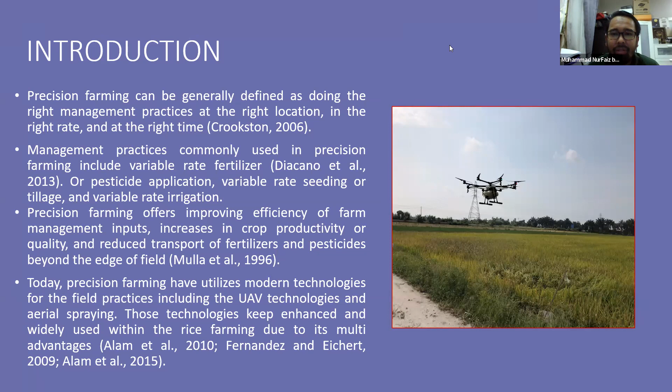They have been using a lot of sensors to extract information on soil characteristics for soil prediction, soil fertility, and for precise fertilizer applications.

We also use plant imaging to determine the population, what's called the plant density inside the fields, and we're planning for precise harvesting.

The uniform harvesting process is very crucial so it helps further in scheduling the harvesting process and prevents delays during agriculture activities. It further helps in transferring and harvesting the crops from the field to the markets.

Crop protection and fertility, of course, yes—one of the fundamental applications for using drones. Right now there are a lot of companies that cover using insurance for the rice field.

They use this drone as part of the mitigation or planning process in covering crop losses for any disaster, especially right now my country also has problems with cyclones and heavy rain. So insurance companies are using drones in predicting what crops are being lost, to help farmers cover their losses.

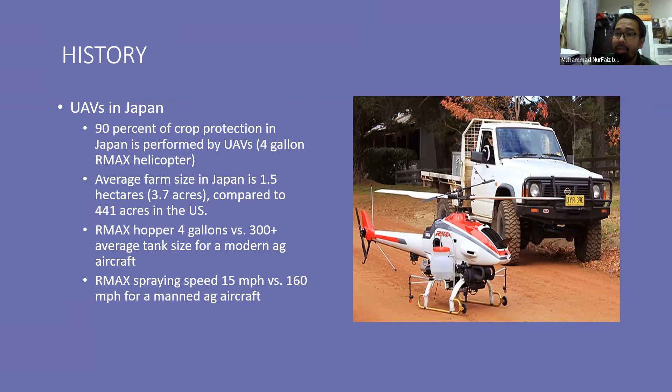And China, I think, is going to seek - covering the markets in terms of drone technologies.

There are types of UAVs: single rotors, multi rotors, fixed wings, and also a hybrid type of multi-rotor plus fixed wing called VTOL. Each of these types of UAV has its own specialization for application in agriculture activities.

Single rotors can be used for spraying, especially for small areas. Fixed wing is for mapping, surveying, and monitoring. Multi-rotor is a more stable option for accurate and precise spraying. Hybrid multi-rotor and fixed wing also has multi-specialization, multi features for agriculture activities.

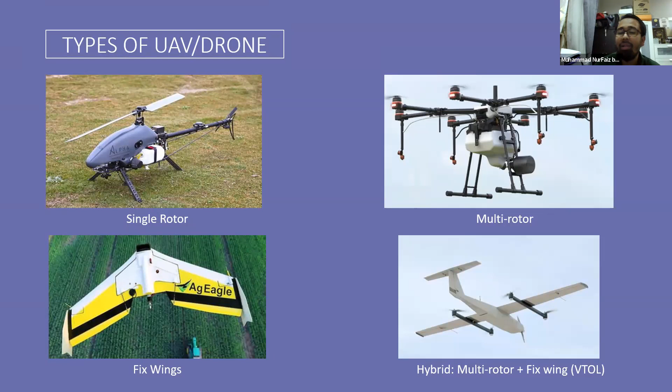You can see the comparison between these types of UAV in terms of altitude, control range, and speed. Multi-rotors, like the DJI Agras, can reach altitude up to 2 kilometers, with a range covering about 5 kilometers, and a speed of about 7 meters per second. Fixed wing has an altitude of about 0.125 kilometers, a control range of about 2 kilometers, and a much faster speed of 18.8.

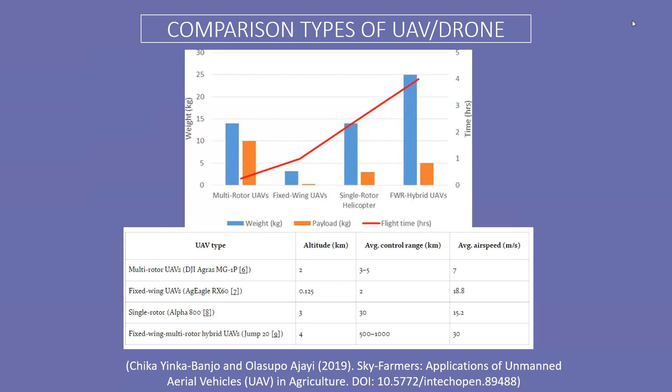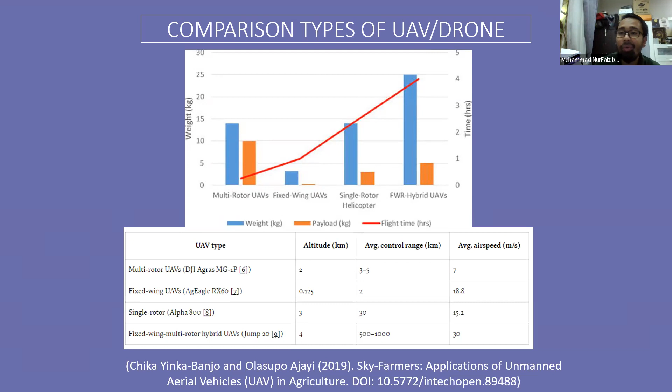Single rotor has an altitude of only 3 kilometers, control range about 30, and speed about 15.2. However, the fixed wing VTOL has an altitude of up to 4 kilometers, much higher, and a control range of up to 1,000 kilometers, with a speed of about 30 meters per second. So VTOL is much better in terms of performance. However, if your farm is huge acres, VTOL may be the right choice, but it depends on your budget and your skilled workers who can operate these. Not every farm can use similar drones.

This one is a DJI Agras, basically being used for my research and also field activities. This is a 15 liter UAV that can be used for crop protection inputs and fertilizer.

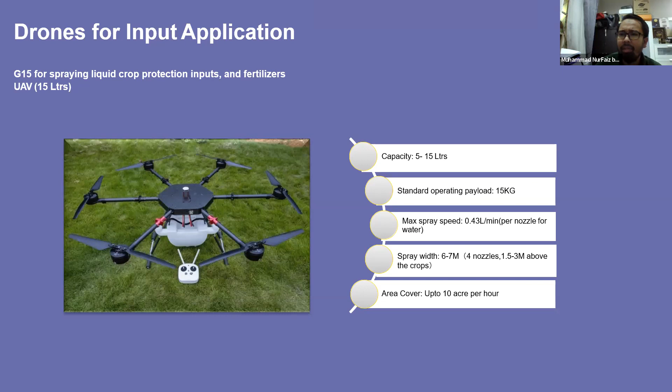Basically, for my research, I focus on fertilizer to understand what actually the best features, best characteristics or parameters are that can be used for application in the rice field.

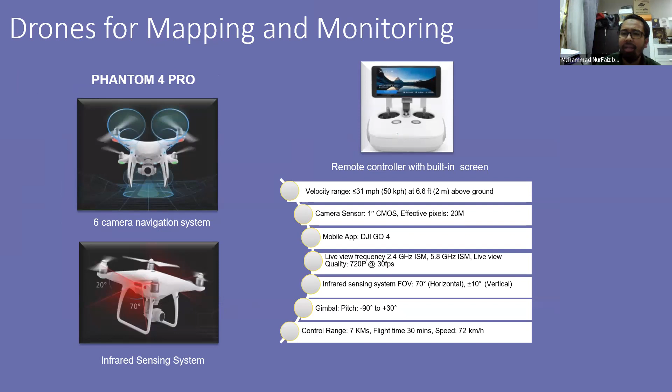So this is a mapping that I basically use, the Phantom 4 Pro, with advanced navigation system combined with infrared system which is much better. And then with sensors, mini sensors that can be attached to the drones, I have further improved this monitoring and mapping in terms of precision and smart farming for the rice field. Right now the cameras are RGB, NIR, multispectral, hyperspectral, thermal.

In fact, right now there's also very cheap LiDAR, small LiDAR from China that can be attached to the drones, so you can have further capability using it for agriculture activities.

So in my country, basically UAVs are solely used for pesticide application, for crop input application. They are less focused on using fertilizer. So maybe the problem is why the farmers, why the service providers are not focusing on using fertilizer. I will try to answer that question, why the service provider companies don't use fertilizer for rice field activities.

So all these technologies, right now there are granular tanks, 8 liters to 16 liters, where a few years ago we only used aerial spraying, but right now we can use granular fertilizer with the drone to spray or broadcast on top of the rice field, which is very important because rice plantation actually requires granular as part of its fertilizer management.

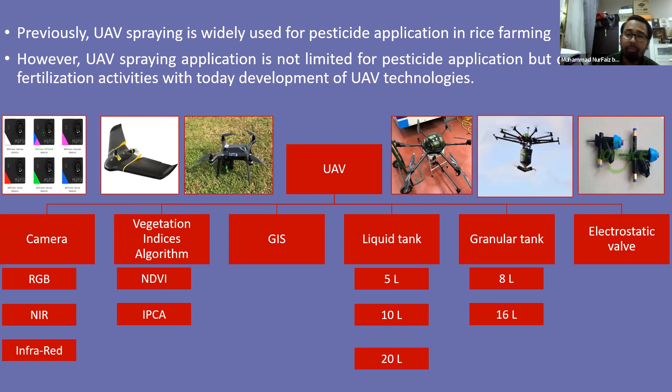And part of that, my study also uses the electrostatic valve, where it improves further in terms of preventing diffusion, droplet dispersing further from the targets. So actually the valve is very important and can be implemented within the drones.

So this is the study that I've done in the rice field at UPM in Malaysia, using the multi-rotor propeller. We maintained the height constant at around 2 meters from the canopy of the rice field, and then we flew the UAV, the drone, at three different flying speeds.

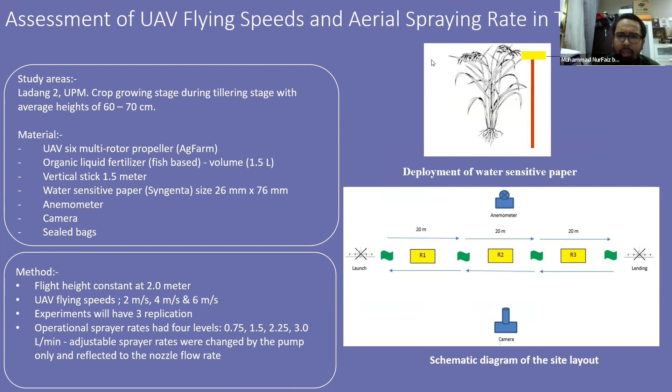2 meters per second, 4 meters per second, or 6 meters per second. And then we had 3 replications, and 4 different spray rates to spray the fertilizer on top of the rice field canopy. So this is a schematic diagram for the site layout. We captured images and all parameters at the field so that we don't miss any detailed information.

So this is a spraying pattern analysis of the result from the experiment, the studies. We found that the droplet deposition density based on the UAV spray rate in liters per minute - 2 meters per second had the highest numbers of droplet deposition density compared to other flying speeds. So 3 liters per minute is the best one if you're flying the UAV at 2 meters per second compared to 4 or 6 meters per second.

However, as we calculated the coefficient of variation, we found that if you like to fly your UAV at 6 meters per second, you should only spray at around 1.5 liter per minute, so that you can get a better deposition density during your UAV flights. But it's recommended for the rice field, to get the highest numbers of droplet deposition density and also less droplet dispersion that doesn't reach the accurate targets, 2 meters per second is the best one with 3 liters per minute.

So the final result, we found that the best spraying rate and UAV speed, while doing the activities, wind speed needs to be around 1 or 2 meters per second only. And then 2 meters above the rice canopy is the best one - further than that, the droplet will be dispersed much further. We recorded that it can go up to 500 meters, the droplet dispersed. So the spray, again, 2 meters per second is the best one with 3 liters per minute for spraying on top of the rice field for fertilizer.

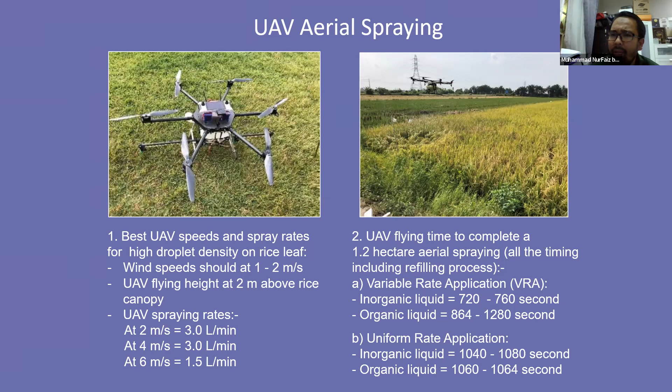The organic liquid takes the second highest speed compared to the inorganic one, because the organic concentration is much lesser compared to the inorganic one. That's why it requires more liquid, and more time, to complete 1.2 hectares for rice field spraying.

We also measured the UAV field capacity, operation time, and number of batteries required during the field operation for 1.2 hectares, as well as the actual field capacity and operation time, so we can provide beneficial information for the service provider. This is one of the tables from the experiment.

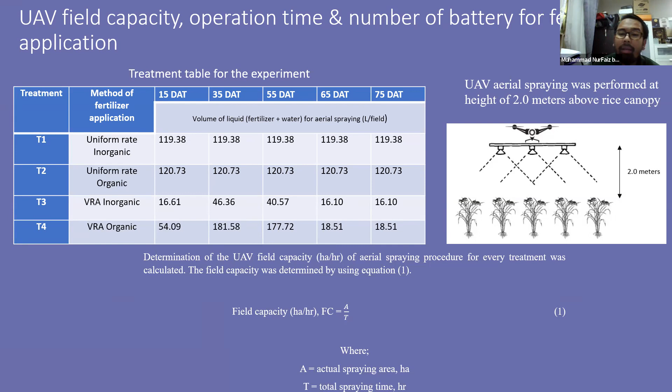This is the volume used. We maintained 2 meters above the rice canopy. This is the equation we used to calculate the field capacity.

This is the result, the total time recorded for UAV spraying operation for different treatments. From here we can see that variable rate application for inorganic is much faster to complete 1.2 hectares.

The area labeled 15 DAT is basically the growth stage of the rice crop, meaning 15 days after transplanting. We recorded activities 5 times until crop harvest. 75 DAT means 75 days after transplanting, around 20 days before we harvest the crops.

We found that variable rate application is much faster compared to uniform, and organic is average compared to uniform. However, uniform is still the highest, taking more time to complete 1.2 hectares for the UAV spraying.

The reason is they are significantly different due to the volume of liquid for each treatment. Uniform requires much higher numbers, the volume of fertilizer recommended by the supplier, so it takes more time to complete.

With variable rate, we do site-specific nutrient management, where we calculate the precise fertilizer needed based on actual crop needs. We have our own modeling based on crop content, and calculate the numbers of fertilizer needed, then supply accurate fertilizer to the crop using the UAV.

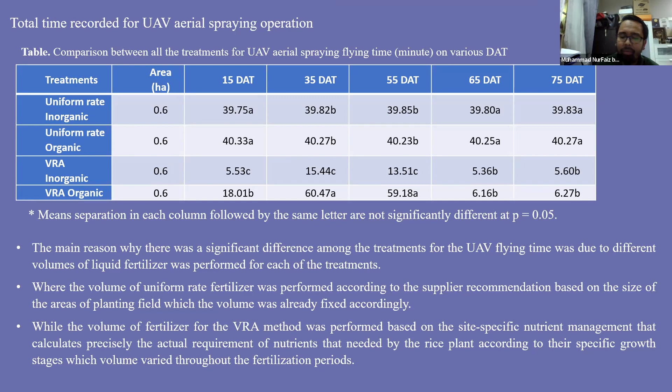So it shows that variable rate inorganic is much better compared to uniform and organic, in terms of total time recorded.

We also recorded UAV refilling frequency, the numbers required for refilling, because refilling is also one of the tedious jobs that needs to be done by the supplier. I think this is the reason why most drone service providers don't implement the fertilizer activity, because there is a high frequency of refilling required to complete 1.2 hectares.

For example, for the uniform treatment, you can see 12 times to refill tanks during the activity, compared to two times only for the variable rate application. For 1.2 hectares, uniform needs 12 refills while variable rate only needs about two refills.

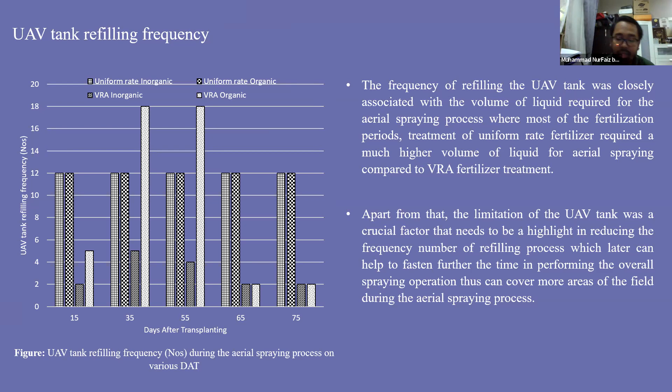You can see that 35 DAT and 55 DAT are very high for variable rate organic. This is because during this period, organic fertilizer was supplied at the highest rate compared to other treatments, since the concentration of organic is lesser compared to inorganic fertilizer. That's why we need to understand this, so that service providers can get this information and apply it beneficially in the field to help farmers.

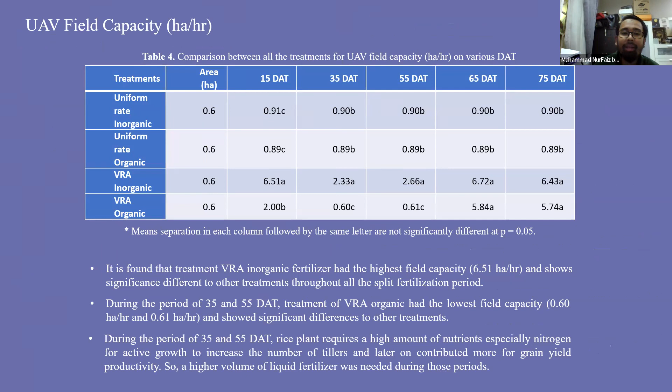So you got the field capacity again. Variable rate application is the better one compared to the other treatments. Uniform is the lowest one again, compared to the variable inorganic. This is in terms of field capacities.

So in conclusion, I can say that field capacity varies according to the different treatments that we apply. And then variable rate fertilizer shows higher field capacity, faster flying time, less refilling process, and uses less battery sets compared to the other treatment for the fertilizer activity in the rice field.

Overall, volume of liquid basically affects the total area spraying process. So from our study, we found that variable application had further benefit in terms of fertilizer application using drones in the field activities. I think that's all for me.

I only had example in case study. Maybe if enough time, you have time to share. We get back to the Dr. Deborah. Any questions? Thank you.

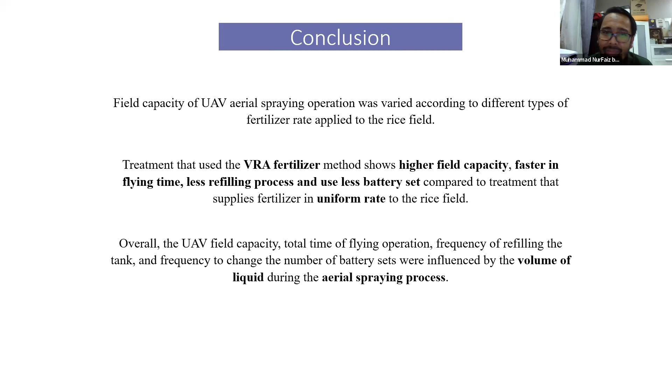Thank you, Dr. Faiz, for that comprehensive response to my question. Are there any other questions for Dr. Faiz? I'm not seeing any in the chat.

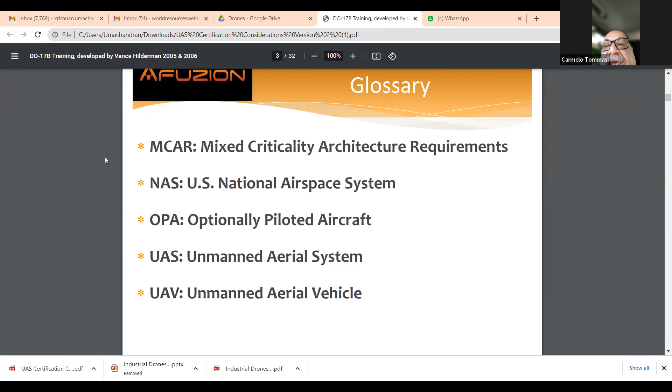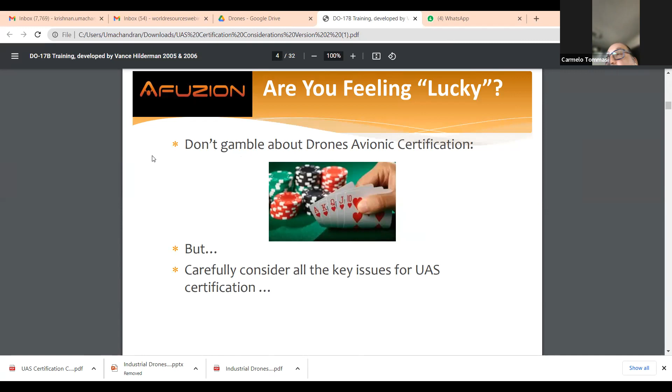It is good if you like to gamble, but please don't gamble with UAV avionic certification, because to have an effective certification, you need to carefully consider all the key issues of the UAS and the UAV.

First of all, what is a UAV or UAS? Is it civil, is it commercial, is it military, or something else? Is it a helicopter, is it an airplane, is it large, small, commercial, civil, military?

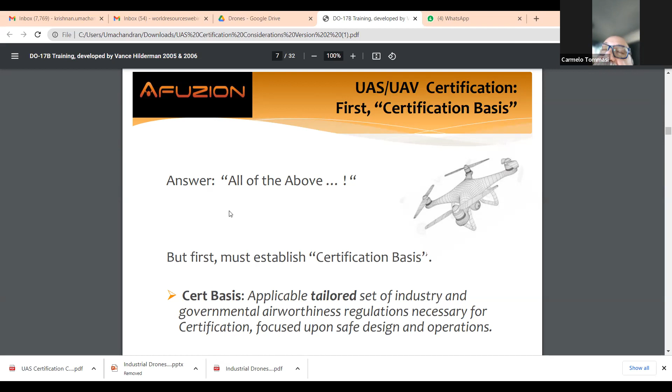The answer to that is all of the above, because UAS and UAV are all the definitions we said in the previous slides. So we have to first establish a certification basis because we have to tailor a set of industry and governmental airworthiness regulation to those kind of systems for certification. And the big focus, especially for civilian application, like the ones named by Mohammed in the previous presentation, is safety of the design, the UAV, for safety of operation. We have to operate safely. Okay, what is the aviation development ecosystem?

Those are all the applicable certification documents. We start from the safety guideline, ARP 4761A. You start from safety, then you go to ARP 4754B, the guidelines for system design and development. And then you have all the specialized documents. For example, DO 178C for airborne software, DO 254 for airborne hardware, DO 278A for the ground station to control the UAV, and so forth.

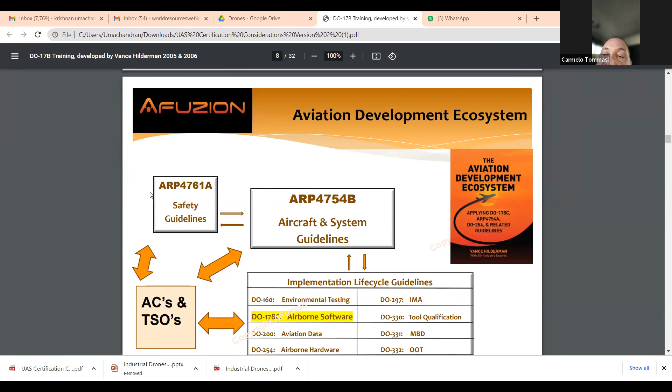Okay, we will try in 3 minutes to have a quick recap of the DO 178C certification. What is DO 178? It is the certification standard for airborne equipment.

DO 178 is software, DO 254 is hardware. It is regulated by FAA in the US, Federal Aviation Administration; EASA in Europe, European Aviation Safety Agency; DGCA in India, Directorate General of Civil Aviation; CAAC in China, Civil Aviation Administration of China. So the names of the document vary. For example, it is DO 178C in USA, ED European document 12C in Europe, or DO 254 in USA, ED 80 in Europe. So the name changes, but the documents are all the same.

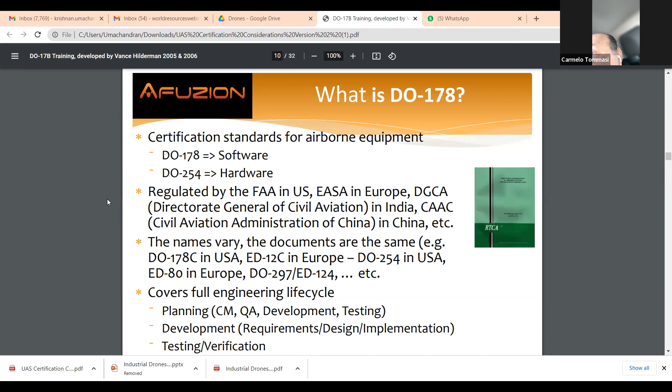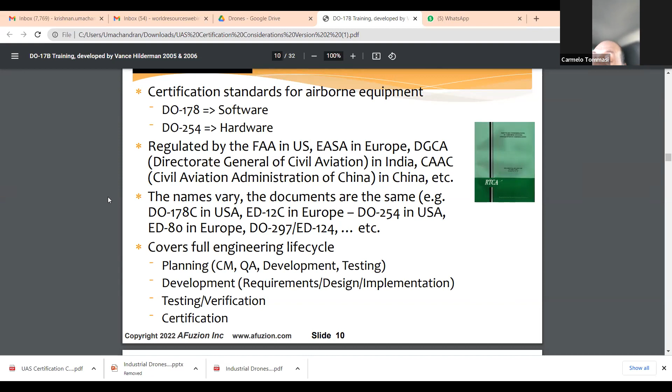The certification considerations for airborne equipment are the same all over the world, and cover the full engineering life cycle of the system: planning, configuration management, quality assurance, development, testing, from requirements to design to implementation, both hardware and software, to testing, verification, all through development, and finally certification.

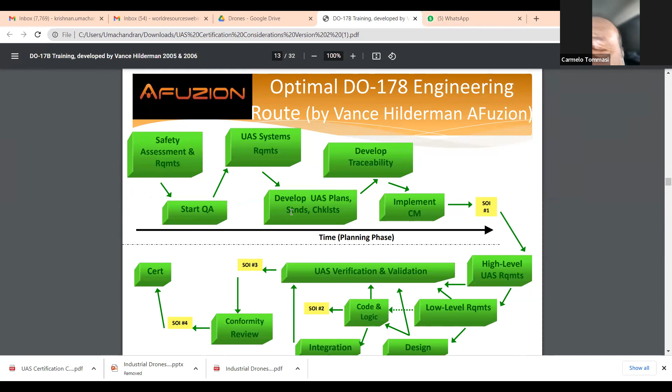This is the optimal DO 178 engineering route also for UAV and UAS. You start from safety assessment and the requirements. You start quality assurance for software and process assurance for hardware. You create the system requirements, develop the plans for UAS and UAV, the standards, the checklists. You develop the traceability from requirement to implementation and implement the configuration management. Then you have SOI 1, stage of involvement 1, with the certification authority.

And you go to high-level UAS requirement, low-level requirement, design, code and logic, integration, and remember the verification and testing. And you have stage of involvement 2 with the certification authority, talking about whether you have satisfied all the requirements with the implementation.

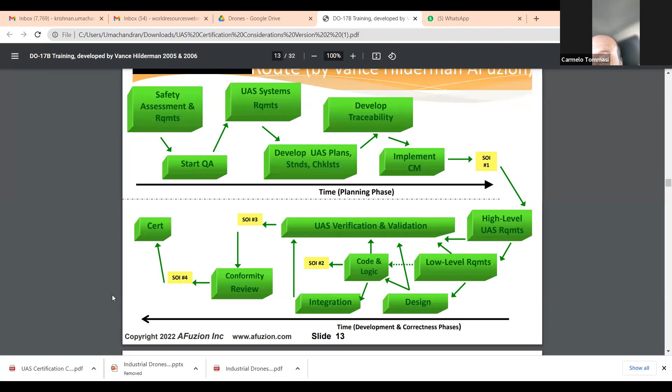Then you go to SOI 3 and 4. Okay, then you have special consideration for UAS.

Go next, please. Hello. UAS are very, very similar to commercial aircraft, which require DO 178/254, because they have complex avionics, they have complex integration, they have COTS, standard components. As Mohammed said, there are standard sensors in the UAV.

So you have landing and takeoff procedure, commercial airspace, and if you have an accident, you have civilian death. So for commercial usage, the top priority is safety. For military use, the target is not safety, but success of the mission. And let's say that the civilian certification authority lacks common knowledge to apply commercial certification rules.

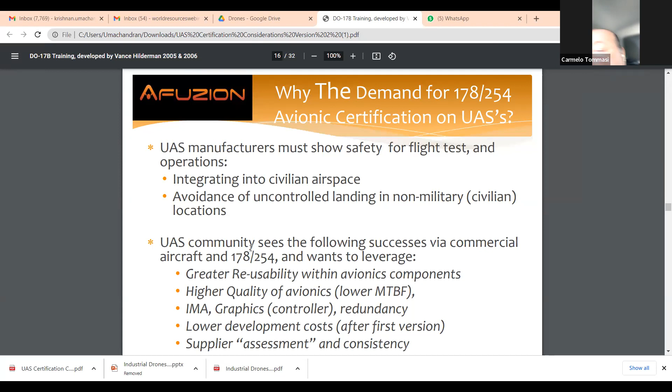Why is there a big demand for DO-178/254 avionics certification on UAS? Because UAS manufacturers must show safety for flight test and operations, since they have to integrate those systems into civilian airspace, and they should avoid uncontrolled landing in non-military locations. The UAS community has seen the big success that certification strategy in many avionics companies has reached, achieving great reusability of the UAS, higher quality avionics, lower MTBF, IMA redundancy, and lower development cost after the first project. The first certification project may cost twice as a normal development project, but from the second one on, you save money.

Some special issues for UAS: what is the criticality level? Is it safety, mission, or operation? Is it airborne or ground-based? The DO-278 applies to ground-based system certification and does play a role. Then a big role is played by FAA Order 8130-34D, certification of UAS—a document from the Federal Aviation Administration in the USA, which we will detail later. And the US Air Force MCAR, Mixed Criticality Architecture Requirements for UAS, which we will also describe later.

Let's talk about FAA Order 8130-34. It was the first document to address UAS and UAV, issued in March 2008, titled Airworthiness Certification of Unmanned Aircraft System. This order was adapted from a collection of different advisory circulars, for example FAA Order 8130.2. The most recent version of 8130-34 is 8130-34D, which applies not only to unmanned aircraft systems but also to OPA.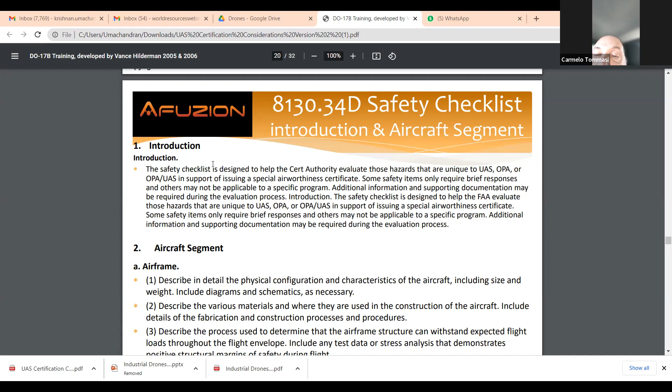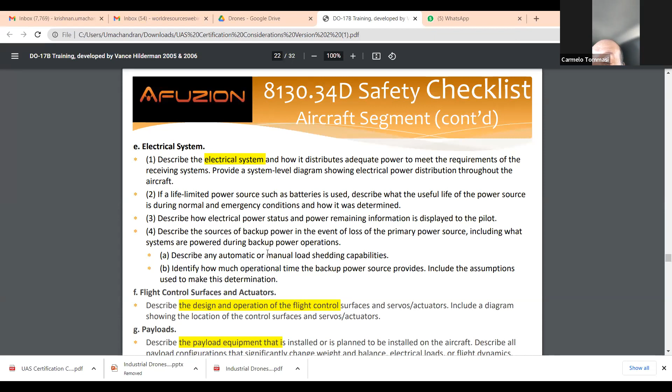The electrical system is described in detail, including the flight control surfaces and actuators, and the payload. You must describe the payload equipment that is installed in the UAV.

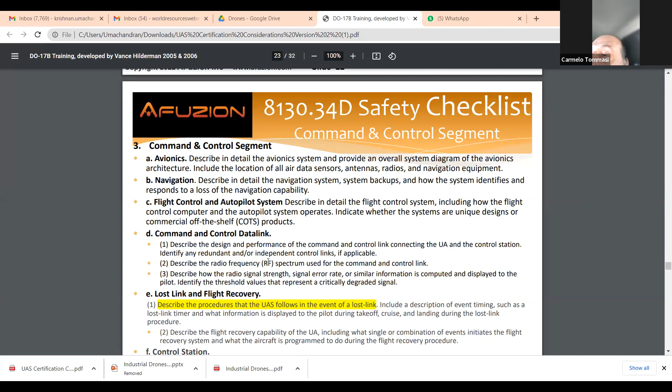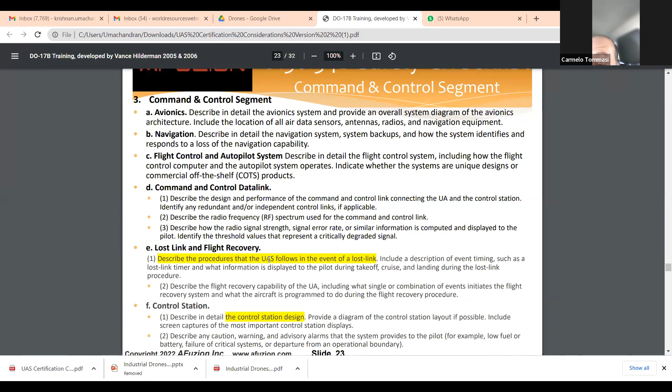Those are design checklists for the command and control segment—avionics, navigation, flight control, and the autopilot system, and the lost link. You have to describe in detail what happens when you lose the link to the UAV. What happens? Does it fall? Does it softly land? This should be very, very detailed. Also, the control station must be described in detail.

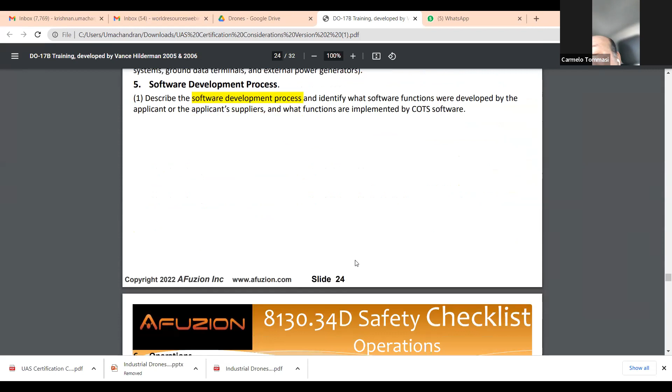The ground support equipment—how it is done, and how you mean to develop the software, both for the UAV (airborne software) and for the UAS system. Then you have to describe the operation, how the interaction works between your UAV, UAS, and the national airspace system.

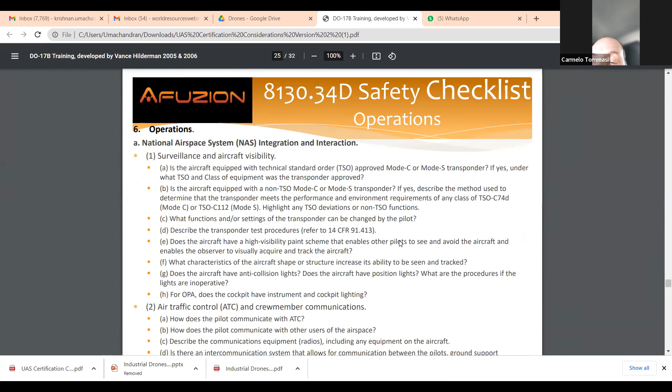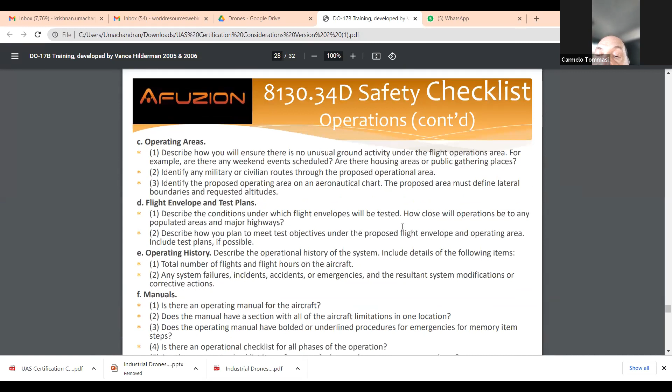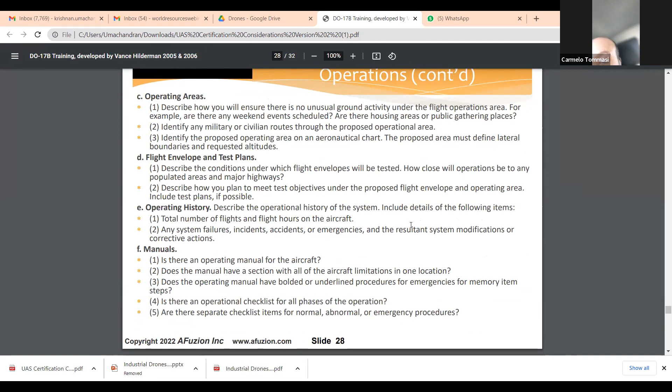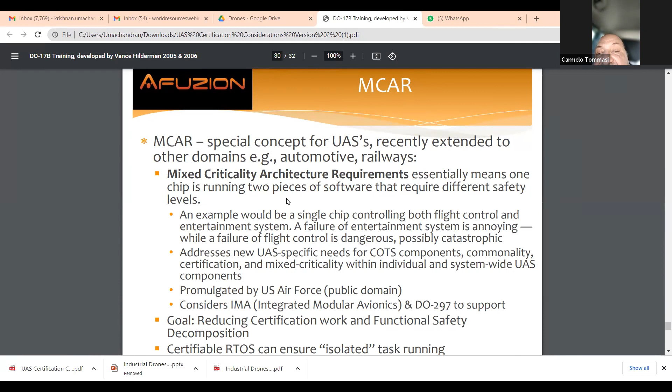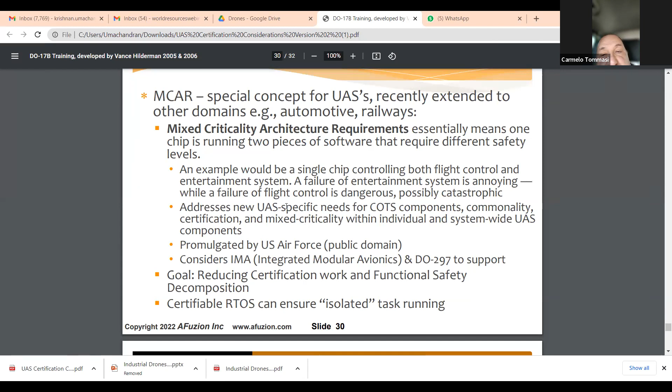MCAR is a special concept for UAS, recently extended to other domains—for example, automotive, railways, transportation, and so on. Mixed Criticality Architecture Requirements essentially mean that a CPU runs applications with different criticality levels. For example, the same chip that controls both flight control procedures and the entertainment system—so very different criticality levels. This has been promulgated by the US Air Force.

What is the goal? The goal is reducing certification work and functional safety decomposition, so that a certifiable real-time operating system can ensure isolated task running.

And finally, the summary of my presentation. Integration of the UAV into the NAS and other countries is an extremely complex undertaking because it involves safety of people, people's lives, casualties. So it is very important.

There are several issues that need to be resolved before the UAV can freely fly in the airspace system. So the goal is on safety, and R&D of UAVs is focused on advanced mitigation of performance shortcomings to facilitate integration in the airspace system. And very important, cybersecurity is becoming an increasingly important factor for UAS operation.

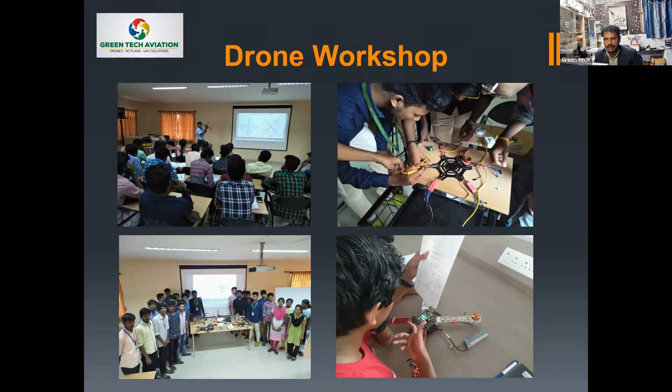So we'll be using some flight controllers like Pixhawk. Pixhawk is available worldwide, and it's an open source platform. So we can change basic values also, and we can reprogram it. Like that, we'll be training the students for doing those things.

So these are some air shows. We have a lot of aircrafts in our office, like IC engine powered, electric powered gliders, even aerobatic models - a lot of things we have. Even control line also we have. That is the most important hobby in foreign countries.

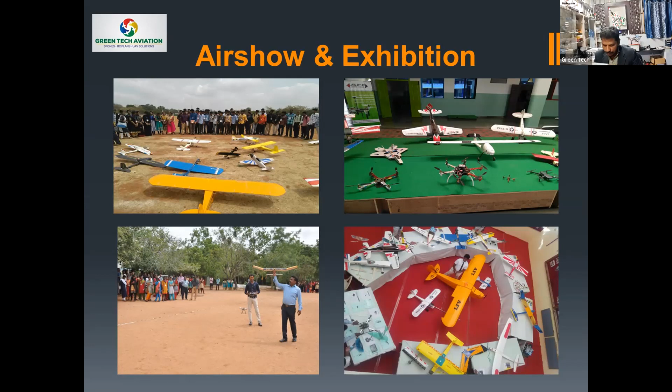They'll be using small IC engines to power their aircrafts to fly. These are the things that come before drones, because control lines were there more than before, like 40 years before it was there. So these are some big aircraft we'll be doing, and we'll be telling them about aero sports also we'll be doing, like taking the students into hot air balloons for the joy rides and all.

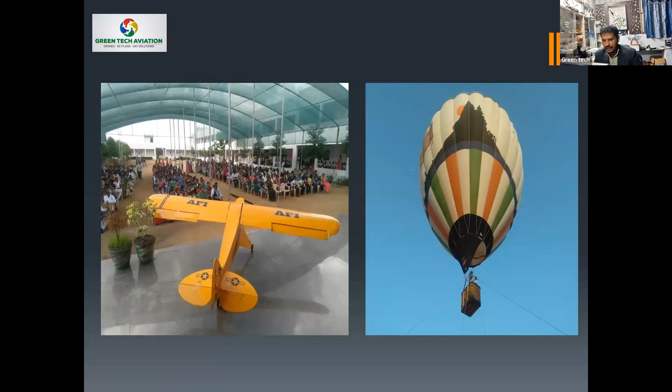So up to there, these are a simple introduction of the company - these are the activities that we'll be doing. After that, we have the main topic that we are in discussion, that is drones.

Basically we'll be using drones for these activities, like performing a mission. Initially, it was done for surveillance, using a camera for surveillance purpose. After that, we are considering it as a vehicle.

If you want to go for long range, then we'll be switching it to aircraft, so it is a combined platform. So like that, the drones are introduced.

On powering the drones, mostly they'll be powered with a BLDC motor, so the motors rely only on the batteries. Nowadays we have some batteries that are highly efficient, but the thing is there are alternate sources that came into the field. So general problems with batteries are these ones - we'll consider the battery limitations and all in the further slides.

So these are the known power sources right now in the field for powering the drones. First one is your batteries, already discussed. And the next one is your solar power panels. In fixed wings, it is mostly useful, but in case of multi-rotors, it is actually not possible because panels are not providing high density power.

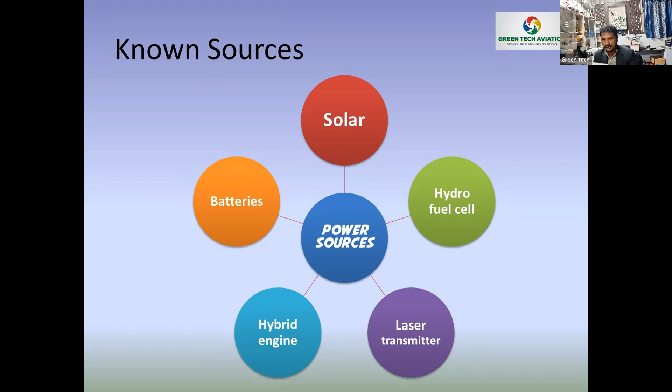Next one is your hybrid engine. That is the topic of my day, so I'll be concentrating on hybrid drones today.

In case of batteries, we'll be using lithium polymer batteries mostly, generally in the capacity of 30,000 mAh or 16,000 mAh. For our agri drones we use 16,000 mAh batteries. But whatever the mAh I'm using, I will only get 20 to 25 minutes of flight time. If I increase to 20,000 mAh instead of 16,000, even then I will only get 2 or 3 minutes higher, because of the weight of the battery. So we need to work on that - batteries have some limitations.

For choosing a lipo battery, if you are doing a project or making your own drone, you can use some simple calculations. Generally a battery is defined with 3 parameters. First, what is the voltage of your battery - that means cell voltage. Each lithium polymer cell is 3.7 volts. So if you are using a 4 cell battery, it will be 3.7 into 4, which is 14.8 voltage.

Not only voltage is a limit, we also have to concentrate on discharge rate. Discharge rate measures how much time that battery can safely discharge this voltage - that is the C rating. If you want higher power, like racing drones or FPV drones, you have to go for higher C rating batteries. If you are going for fixed wing aircraft like gliders or simple camera payload fixed wings, you don't need higher C rating batteries - you can go with 20 or 25 C, that's enough.

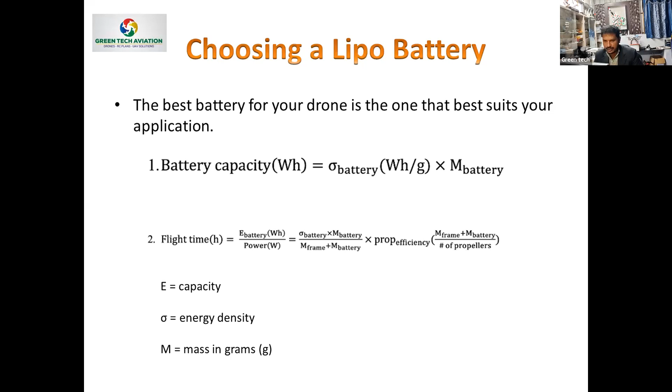If you want a better flight time, you need to optimize the battery selection very well. That's to be concentrated by choosing some basic formulas. Even without going too much into aerodynamics for the drones, you have a lot of online calculators available in the market, like Prop Calc and Omni Calculator. With that, you can make simple calculations like iterations - make initial calculations, then update them, because if your calculation is wrong you have to change your assumption to make it a better optimization. Once optimized, you can go for production lineup.

So this slide, we already discussed that - we have certain limitations in the battery.

As I already told, if you are going with low energy density batteries, you don't have enough power to take off your model. So mostly agri drones are powered with 100 kV or 340 kV motors based on the configuration. If it is a hexacopter, the kV will be higher, and if it is a quadcopter for the same capacity, the kV will be lower.

The term is already known. If your kV rating is higher, the RPM is higher, and if your kV rating is very, very less, the RPM is less, but the torque is higher. So in that term, we'll be having the battery.

Generally the batteries take a long charging time. For example, we are using a 16,000 mAh battery, so that is taking nearly 35 to 40 minutes with 14 amps of current. If I increase the current amps, it can charge in less time, but the cycles will decrease soon. So you have to charge your batteries at less amps, mostly up to 10 amps or 8 amps, but it takes more time to consume.

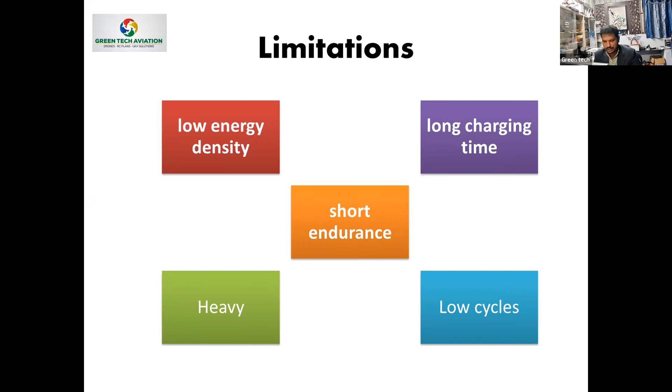So, short endurance. Most of the batteries will give only 15 to 20 minutes, and the camera drones available in the market right now are giving 30 to 45 minutes. That is ready-made drones, with DJI or 3D or whatever, only giving 35 to 40 minutes. That is the maximum achieved. So batteries are a little bit heavy based on the capacity, as already discussed.

So the next power source is solar power. Solar power is, as I already told you, with a panel you will be generating energy, and we'll also be using a battery in this system. The panel gives the continuous current for charging the battery, and the battery will be responsible for the entire flying. That is one option. And one is backup power.

With the panel, voltage will be directly powering the drones, but if sunlight is lesser in some places, the drone will not have enough voltage. At that time, the battery is used as backup power to power the drone.

So these are some images of projects we have already done on solar powered UAVs for students or R&D institutions. We'll be fixing some panels in an array, connecting them in series. So you will have higher voltage, and if it is parallel, the amps will be higher and the voltage will be the same.

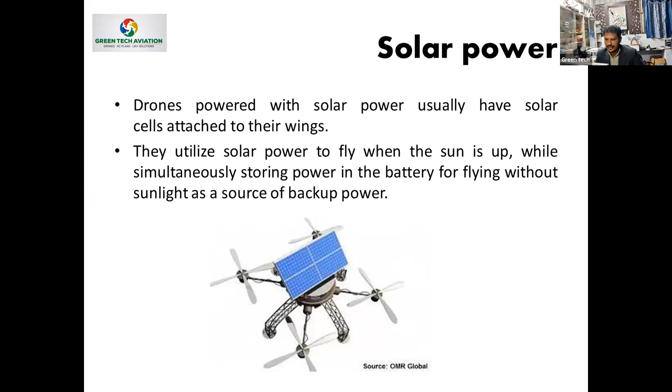If it is a 12-volt panel, like 100 panels, if I'm using the panel, the net voltage will be only 12, and I'm having a higher amp, so I can power my motor. So if you have higher wing space and wing area, you can make panels and use solar power. If it is not there, we can't switch to solar panels. But nowadays, a lot of other panels are also in the market, so we can switch over for that.

And one more thing is the hydrogen fuel cell. It is mostly silent, so it doesn't make any direct pollution to the environment. It is not like if you are going with hybrid drones, which are powered with an internal combustion engine and produce some noise, which is a problem for the environment. In case of the hydrogen fuel cell, it doesn't produce much sound. It is a powerful source, and you have only hydrogen reacting with the ambient air, making the power source.

So we have some power modules for that. You have to use cylinders, I think the cylinder is there in the photo. With these hydrogen cylinders, the gas will go to the power modules, that is the fuel cell power module. A lot of things are available in the market.

Even Yamaha is also trying to do that, so the research is ongoing. If it is done, it will be like your CNG cars, you can make this also, and instead of putting in gasoline for the hybrid drone, you can make it by changing the cylinders.

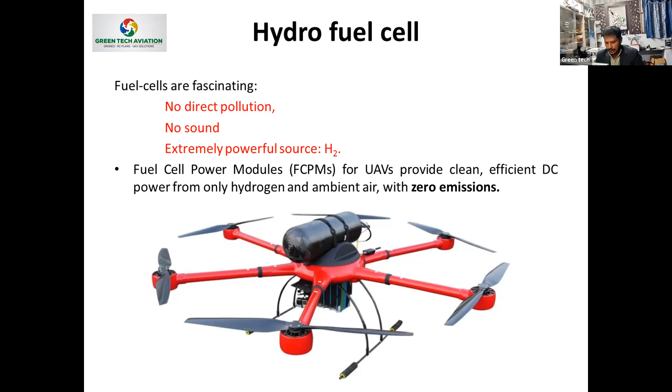The main advantage of this hydrogen fuel cell is you can quickly refuel, or otherwise you can swap out the cylinder. So if you have alternate cylinders with you, once the cylinder is empty, you can easily swap it out. The size can be specified, so if your drone is a camera drone, you can have a small tank with a small capacity.

If you are using agri drones, the bigger ones have a payload capacity of 10 kg, so in that case you can have bigger cylinders. It is a vibration-free environment. Most IC engines produce vibrations while running, but this type of hydrogen cell engine will not produce that much vibration, because for camera payloads the vibrations should not be there. Even with a gimbal, if vibrations are less, it is an advantage.

One more powering system is tethered. Tethered means we give power to the drone from the ground. The main disadvantage with the system is the limitation: mostly it can go up to 300 meters height, but you can't get a circular range. It's not a 300-kilometer range, it is a 300-meter height.

So what is 300 meters height for? You can use it as a temporary communication tower, or for traffic signal monitoring, or for temporary surveillance in areas inside the forest. We can use it as a communication tower to get satellite communication to the local surroundings. So we can use tether drones when we want long or unlimited endurance.

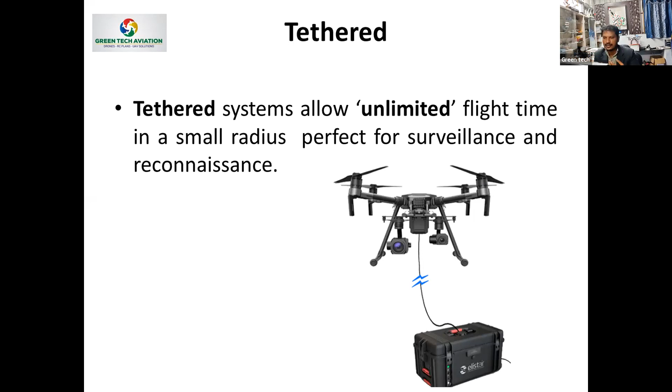The photo shown is a DJI Matrice M300, which can also be powered with a tethered system. You need a special winder system for that, because the winder should be able to identify the tension required from the drone. If the drone wants to go higher, the tension is felt in the winder, so it will release the wire. If it is coming down, based on the tension sensor, it is automatically rewound again. So that's how the system works.

Next is the laser transmitter, a wireless system. Mostly it has two parts: a transmitter and a receiver. We send a laser light to the laser receiver on a flying wing or flying fixed-wing aircraft - you can easily do that. Even for multi-rotors, research is ongoing.

The beam of light is converted like solar power - it is a concentrated beam of light converted into energy by the receiver, the laser receiver fixed in the drone. As shown in the picture, I'm giving an input of 4000 watts. The laser gives a DC input of 3600 watts, so beam power is only 2000 watts, and delivered DC is 1000 watts. So our achievement is easily obtained this way, but it is a somewhat dangerous system.

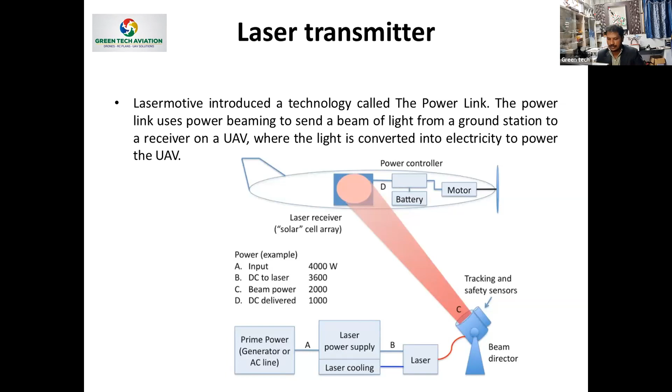Only in line of sight can you do this. If the drone is very far, you cannot do this, because if it's out of sight or there are obstacles, it's difficult to send the power. But it is also like a tethered system - it is somewhat of an updated version. So that's the laser transmitter system.

Next is our main topic of hybrid drones. Hybrid propulsion is a main topic because we are already in the field - we are selling hybrid drones to customers and servicing them, and that is why we mostly concentrate on this topic. A hybrid propulsion system has two power sources: one is the battery and one is the engine. This process gives high efficiency and extended flight time.

Most agri drones are battery powered. If I'm using a 16,000 mAh battery, I'll get 1 to 2 tanks per battery cycle, so if I want more tanks, I can't go further. With the hybrid drones we are doing right now, it gives 45 minutes of flight time with 3.5 liters of fuel tank. That is the main advantage for our clients.

Clients don't need to buy extra batteries, and battery life cycle is also limited - like 300 cycles a company gives - so if it goes less than that, or after 300 cycles, what do you do? The battery has to be thrown out and we have to buy a new one. That is why we go for hybrid systems, which reduce energy consumption rates without degrading flight performance, giving a high and efficient system.

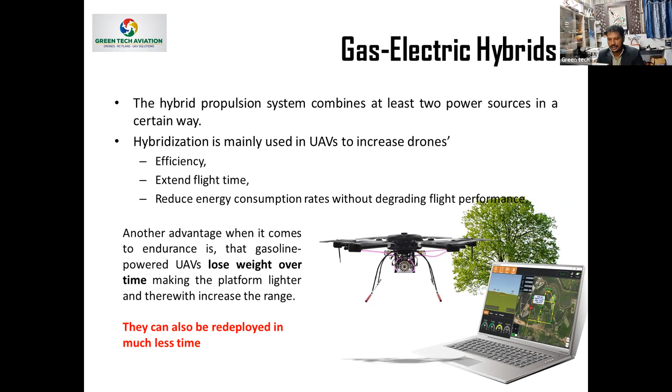So redeployment is also easily done while filling the pesticide, like a 16 liter tank we are using. So while filling that, we can easily refill the petrol, the gasoline, also.

So hybridization, already I told you, is a combination of internal combustion engine, otherwise a gas turbine engine we'll be using. Mostly we are into the field of internal combustion engine. In depth, it is a two-stroke engine. Two-stroke engine we'll be using in this our hybrid drones.

So it is not a direct drive. The engine will be used as a generator. Generator means the engine is converting the chemical energy into mechanical power. So the mechanical energy is converted into electrical power with the help of a starter generator, and that generator will produce the required power for the system.

For example, the generator can be powered up to 6 kW, so 6 kilowatts of power is produced from the generator. Mostly we'll be using that type of gensets only. We have 7 kW also, but currently we are using 6 kW gensets. The engine is a 100 to 120 cc engine we are using here.

So with that generator, it keeps on charging the batteries, and also the entire drone systems like flight controllers and motors, everything is powered with that energy, because all are interlinked - engine power is interlinked with the battery, flight controller and motors. So with this interlink, if any power drop is there from the engine, the battery will immediately come into action and give the required power for the flight.

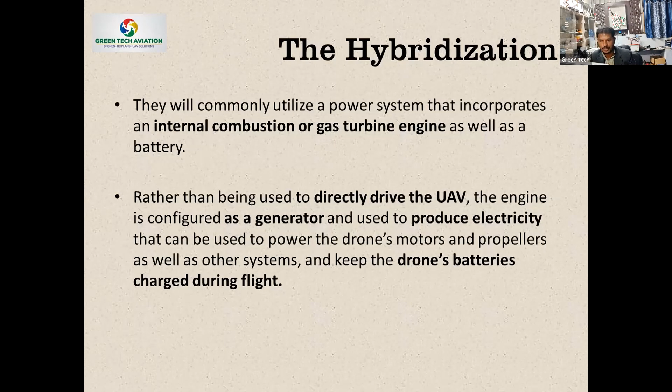Like if the fuel is empty and the engine is turned off, the battery will be used as an emergency backup. And sometimes the engine is clogged with dust and is not producing enough RPM, then that time also the battery power is used. So this is a typical layout of the total hybrid system that we are using now.

So in this, we'll be having a quadcopter layout. That is why there are 4 brushless motors. So 4 brushless motors absolutely require 4 ESCs there. So with the 4 ESCs, power is powered to the main power distribution board.

So the power distribution board is connected with the main battery power source and the engine power source, and you have a power module because the flight controller is operated under 5 volts. That is why we need a power module, and that module will also be used as a power monitor. It will give you the live voltage - what is the remaining voltage and what is the live voltage coming from the engine and from the battery. Based on that, you can calculate your entire flight time and monitor the system.

Mostly flight controllers have all those necessary components, I think you already know. The first one is GPS and compass, and safety button with LED, because everything is a power consumption object, that is why it is mentioned here. Buzzer is also a power consumption item, and your wireless transmitter is also a consumption here, that is why it is mentioned in this link.

And the next one is your signal encoder. So all the blue lines are your engine components and the green line is your electronic components. The engine components mainly consist of the battery.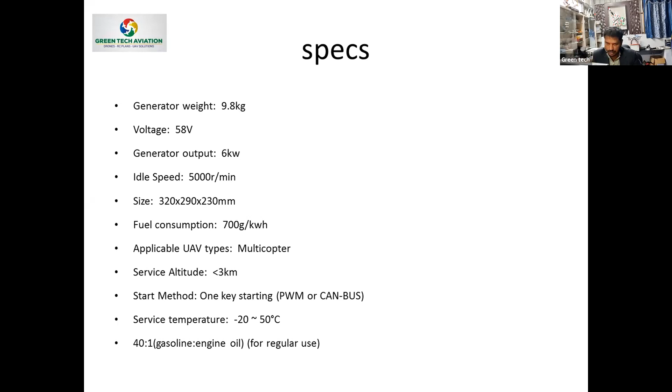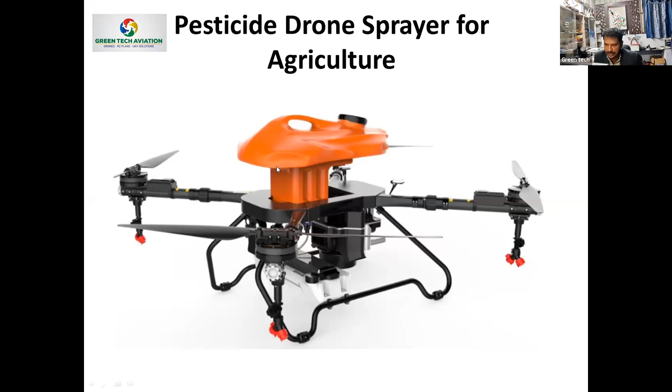So we will be using this model for our clients for pesticide spraying. The tank is a 16-liter capacity, and you have an engine here, and the motors are there. So these are some live photos that we are using. In this photo, I am sitting over there. And this is a hybrid drone that we are doing.

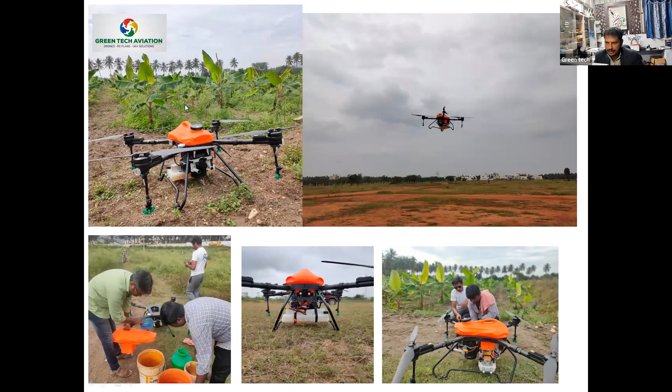So these are some data that we are taking before delivering to the customer. For example, we map an area in the mobile phone with the software. With that, we track what voltage the drone has while takeoff, what is the voltage while landing, and while flying, how much voltage is dropping. So likewise we are doing that.

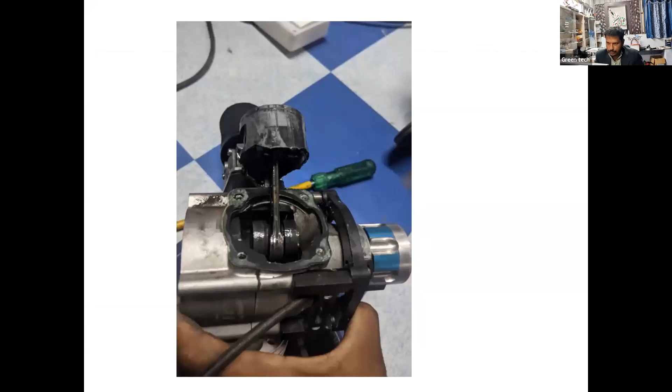So if there is any service now, this is an exact photo taken last week from a client. If it is mishandled, overheating will lead to piston breakage and connecting rod problems. So you need to maintain the heat every time.

It is a water cooled engine. I think you can see the tubes here. So it's a water cooled, liquid cooled engine. If it's not properly maintained, the coolant, you will have damages like this.

A lot of other photos also there. So on that, I am concluding my session. There are a lot of energy sources available in the market, but as of now we prefer the hybrid solution, because even hybrid cars are now popular in our country. Like that, hybrid drones are also evolving day to day. Initially it was air cooled, now it's liquid cooled, and hydrogen cell is coming. So hybrid systems are mostly preferred here. This is my conclusion, and I thank everyone for listening to my presentation.

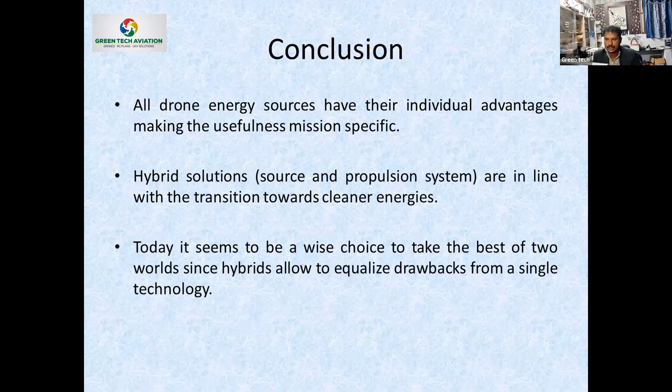That was a very interesting presentation on insights into how we can power drones using greener technologies, very much in keeping with the Sustainable Development Goals for the Agenda 2030 by UNESCO. I now open the floor for questions for Mr. Nehru. You may type it in the chat, and in the interest of time, you may open your mic and ask the questions.

Okay, Samson, if you are asking a question, we would like you to reduce the noise in your background, or you may type it in the chat or speak into the mic. Samson, do you have a question? Okay, I'll ask you. Okay, you closed your mic.

That's fine. Mr. Nehru, what sort of prerequisites would students need to engage in training at Green Tech Aviation, and how can they advance in that area in their career if they were interested in these sustainable energies for powering drones?

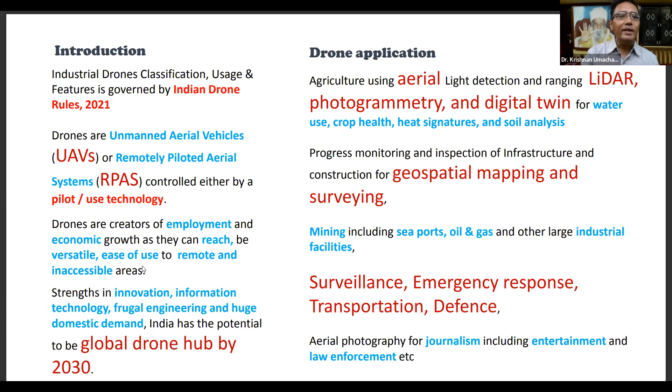So this part of drone usage, the drone technology, is being a diamond for the Indian government, where the Indian government is now thinking of becoming a global drone hub by 2030. So by 2030, when our country wants to become a drone hub, we need rules, and for this they have created the rules called Indian Drone Rules 2021.

The way they classified unmanned industrial drones is they divided it into 5: nano, micro, small, medium, and large. It all depends on the weight or the payload, including itself, what it can carry.

Nano can go up to 250 grams. Micro is from 250 grams to 2 kilograms. Small is 2 to 25 kilograms. Medium is 25 to 150 kilograms, and large is more than 150, up to 500 kilograms. Drones up to 500 kilograms are called drone taxis.

The usage of industrial drones is mostly for service delivery - take something and deliver it to a specified location, or for surveillance of logistics with secured services including cash transactions. And many of these are used for survey mapping or landing into hard-to-access places, sources of contamination, or hotspots and containment zones affected by diseases, including the currently running COVID, and to also facilitate aerial vision. These are the uses where industrial drones are being applied.

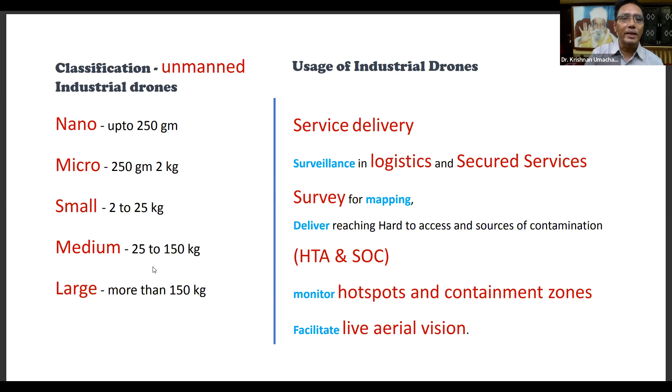And for this, the industrial drones are now confined to the Indian drone rules. So the government is now opening it to industries with a good heart - they want to have trust, self-certification, and non-intrusive monitoring. This is the preamble on which the drone rules are charted in India, for giving supernormal growth while balancing safety and security considerations.

For this, the initial red tape removal is they have removed approvals like UAN, unique authorization number, or UPIN, unique prototype identification number. They have also gone into reducing the number of forms you need to comply with for using drones - that has been reduced from 25 forms to 5 forms. And the fee has been reduced from 72 types to 4, for economical use of business.

When the certifications are getting reduced, that means it covers manufacturing or airworthiness, conformance, maintenance, import clearance, acceptance of existing drones, using operator permits, how an R&D organization can use it, how a student can use a pilot license, or how a remote pilot instructor authorization can go, or drone port authorization - all these are covered in the Indian drone rules.

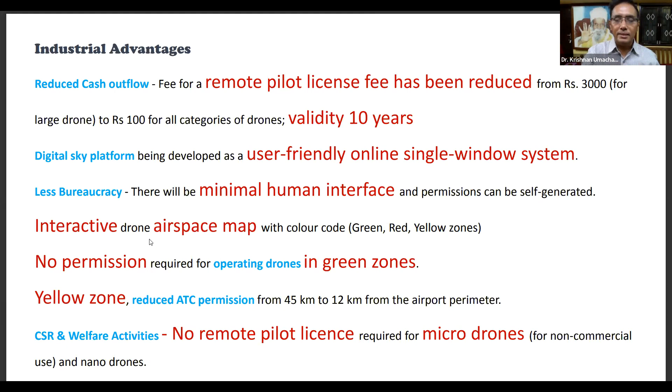Whereas in CSR and welfare activities, where you want to have people being protected or helped through, then no remote pilot license is required. And especially for micro drones, for non-commercial or nano drones, there is no kind of limitation of license required for using these drones.

Next, coming on to the red tape. As we said, there is no requirement of type certificate, UIN, and remote pilot license, or for R&D activities, unless if you own it and use it on a rented premises. And if it is in a green zone, there is no problem.

And the more important part is many of us buy drones from outside, from other countries. So import of drones is regulated by the DGFT, that is the Directorate General of Foreign Trade, as Tommasi also said, and the DGCA, the Directorate General of Civil Aviation - they have to give a clearance. But now DGCA clearance is not also required. You can just use one door, the DGFT, and get it.

So no security clearance or issuance of registration or license is required for using a drone, provided again it is used in the green space. Coverage of drones has now been increased from 300 kilograms to 500 kilograms. So 500 kilograms is almost half a ton, which is nothing but to lift approximately a maximum of 4 people at 100 kilograms each that can be lifted.

So you have a payload of a human being lifted and moved across the sky. So there's a great opportunity for newer enterprises being evolved through drones.

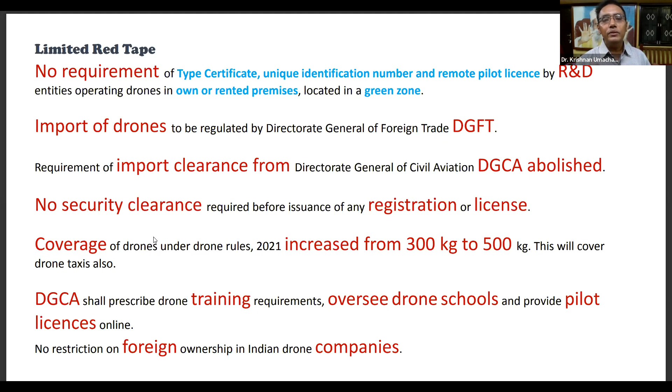Then DGCA prescribes training. They also oversee drone training and give pilot licenses online. So you need not run around or rush to waste your energy and resources to get a license for using the drones. There's no restriction for foreign companies to operate in India also. So of course you have to get registered as a company, and then start using the usage of drones as your business.

Then coming on to license, testing, and certification. License is normally given by DGCA within 15 days. And you can also go with schools like what Nehru has been handling, authorized drone schools through digital sky platforms. These people can help people learn around or get skilled in the usage of drones. See, buying a drone is easy, but to know appropriately how to use it and where to use it and why to use it is the more important part.

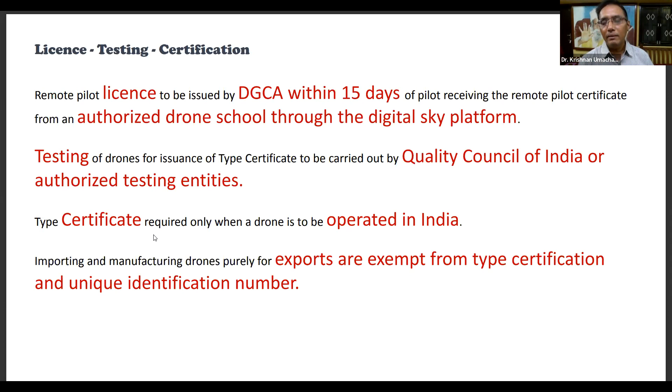Then the testing part of drones - the testing goes with the Quality Council of India through its authorized testing entities, and you get a type certificate through which you can use it in India. You can also import from other manufacturers. Exports are now exempt from type certification, because as Tommasi was saying, it's more on the manufacturer side commitment rather than the user side. So the type certification comes from them, and the unique identification number is to be registered with the Indian authorities.

Coming on to the specific support. Since 2016, drones have been going around the skies in India, but nano and small kind of drones are exempt from this kind of certification. Importers and manufacturers use the UIN on the digital sky platform, and they do a self-certification route. So if you self-certify, then you need not go for getting a kind of permission from the authorities.

And onto transfer and deregistration, you can easily do it on the digital sky platform itself, because once you buy a drone and you want to give it to somebody else, the name transfer is also like a vehicle transfer. So similarly, when the drones were being eased by India, there was a deadline set by the Indian government.

Finally, the important part is on the standards, safety, and if you do an error, penalty, and future promotion. The SOPs, the standard operating procedures and training procedures are already prescribed by DGCA, so no approval is required unless there is a significant departure from the prescribed procedures. As long as you are abiding by the rules, there's no problem using a drone. But if you wish to go beyond that - no permission, no takeoff, real-time tracking, beacon or geofencing - that will be notified in the future.

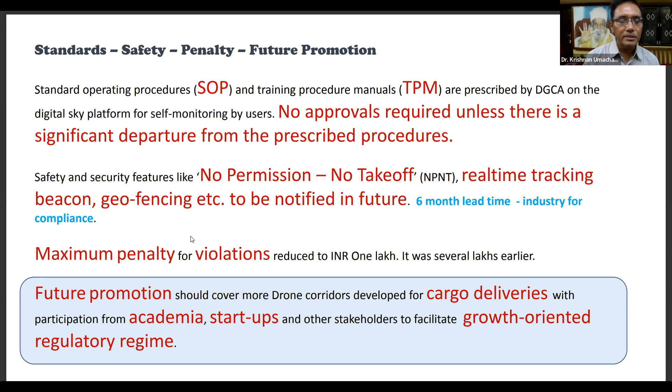Thank you, Dr. Krishnan. I think you put the icing on the cake in bringing it all together and helping us understand what it requires in terms of the rules and regulations and the Quality Council requirements for drones in India. I'm not sure if you intended to go beyond this area, but could you give us an idea of the commercial use of drones, for example outside of manufacturing, such as in retailing and wholesaling, even in the food and beverage industry?

See, drones can be used anywhere to anywhere. It's great flexibility for transportation. But what happens is these are all aerial driven vehicles. When it is going above the sky, it should not infringe with the movement of other aviation, regular civil aviation or military aviation - that is one constraint. Second, the overhead power wires and transmission, data cables or anything, those should not infringe with the movement of these vehicles. So what is required is we need to have the aerial space, the third dimension, the height, which should not infringe with the movement of the drones.